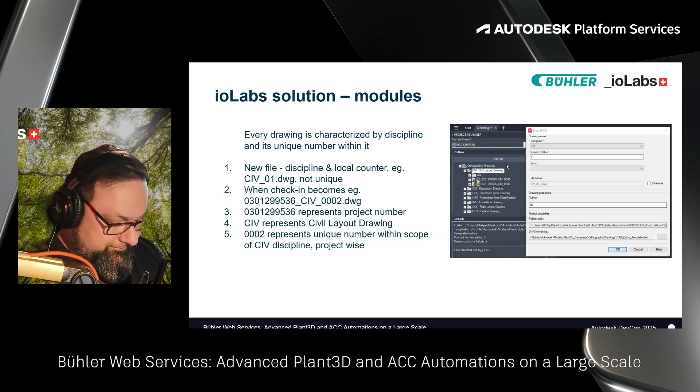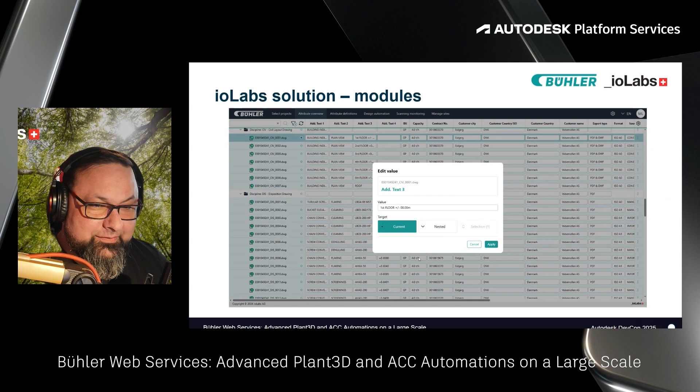Now we can see how a user can modify a certain attribute. He simply clicks on the cell and in the table writes a new value or selects one from the dropdown. Then he selects the scope of the change, which could be just the current cell or all nested cells, going from that level down. So if you're on a folder with 10 files, making the change at the folder level will also modify all the files with the same value.

What we also allow here is, let's say you need to set 10 different files to the same value of a certain attribute. You can do this by selecting the rows using control plus click, and then setting the value.

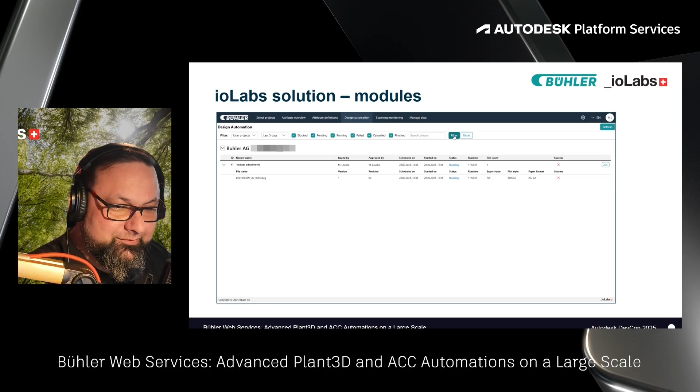This is the design automation monitoring page. It tells us that a certain job, which currently has only one drawing but can have multiple, is running, and once finished it will either mean the file produced by the review is successfully updated, or in certain cases it can fail. This page allows it to be restarted, or if it's beyond repair, cancelled.

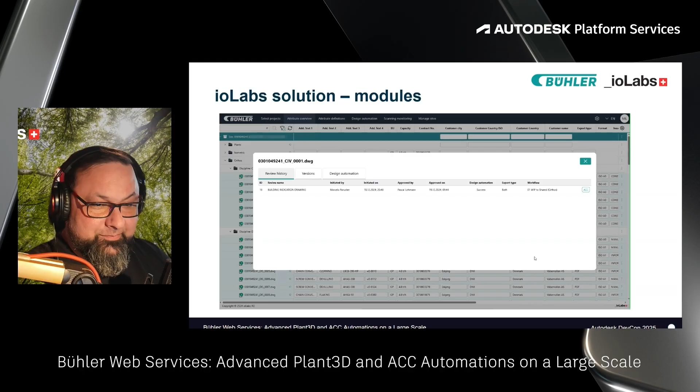If you go back to the tree view, we can also see the history for the files: the version history, the review history, and the design automation history. So we can see all the reviews done on a certain file, all the design automation jobs done on a specific file, by whom and when.

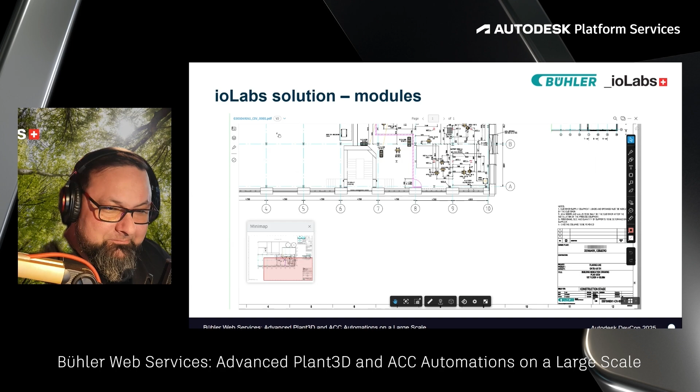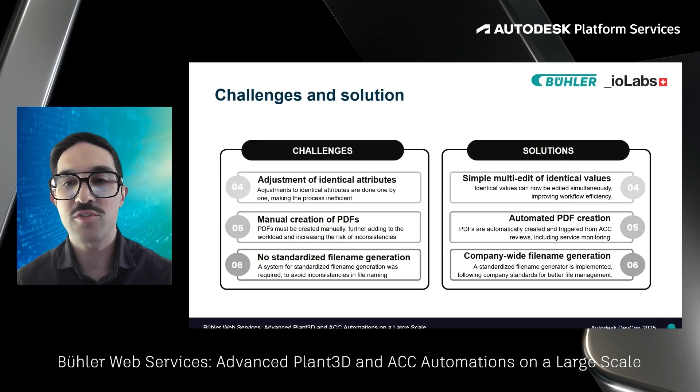So let's sum this up. We have end-to-end Plant3D and ACC integration, with seamless workflows from the beginning of the design to the final output. We have standard design drawings, so all over the world we get the same drawing outputs, ensuring consistency and brand integrity.

Then we also have improved quality and oversight, so we have better project visibility across different projects. We can ensure our compliance and all required standards, resulting in really good process quality.

Then we have significant time and cost savings. Due to the automation, we can shorten the manual steps with good automation and stable tools. We have automated PDF generation in really short time, fractions of a second, or a few more seconds for bigger files, but still really fast, a huge step compared to our last solution. And through everything, we have time savings in attribute management, with inheritance across the whole hierarchically created structure. After that, I hand over to the ioLabs guys for the outlook.

Thank you, Jose. So we are, of course, focusing on the next steps.